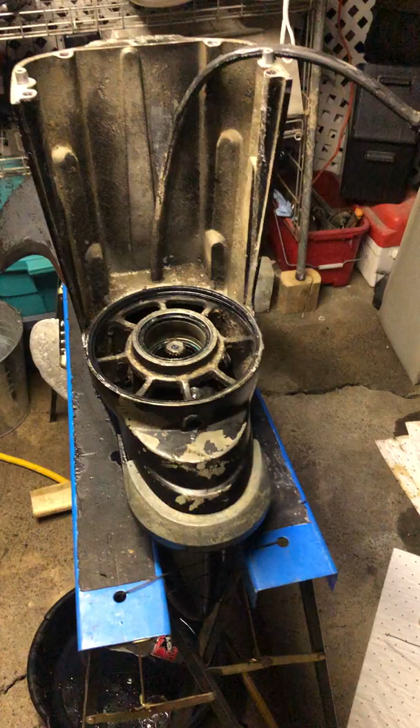All right, let me get you caught up.

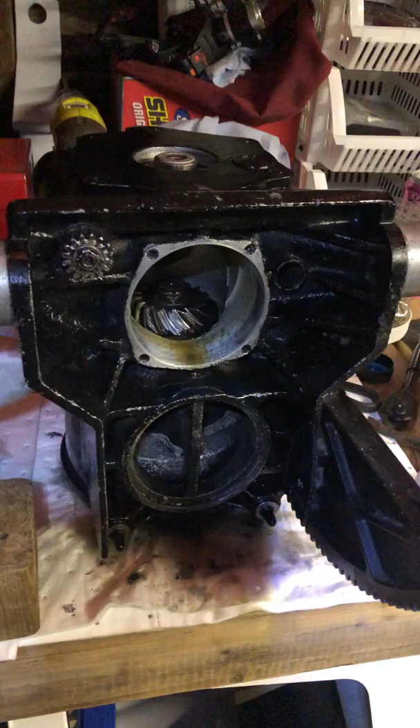So I did a water pump and I also got my gears rebuilt. You can see that in there. I'm sure the video doesn't do it justice, but they're pretty good. I had everything installed, put back together, running on the back of the boat.

While I was waiting for those gears to get repaired by a friend, paid no money to have it done. Actually, it was my cousin. I had these gears in.

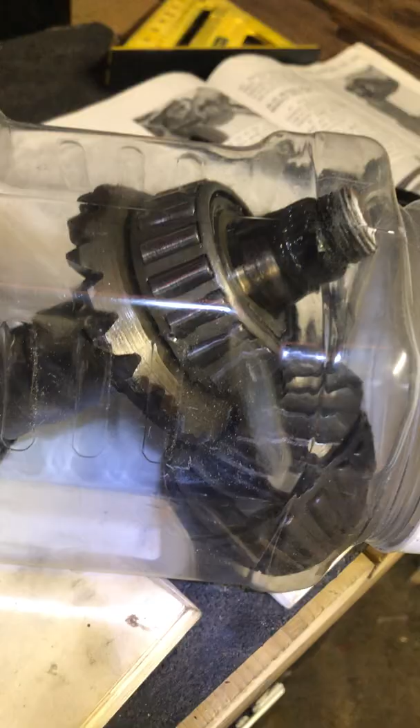A real nice set out of a 1964 something or other. So those are 17 and 21. And the gears that originally come in the stringer, I believe this is an 81 version of the stringer, were...

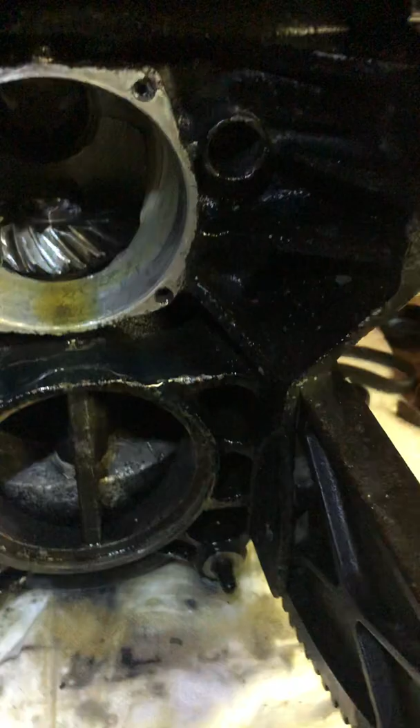19 and 21, okay? So these had some chips in them when I did my water pump and seals last. You could tell it looks like shit in there, hey? Definitely doesn't look brand new. But it seals up, it runs great, everything's good. I just don't beat the shit out of it.

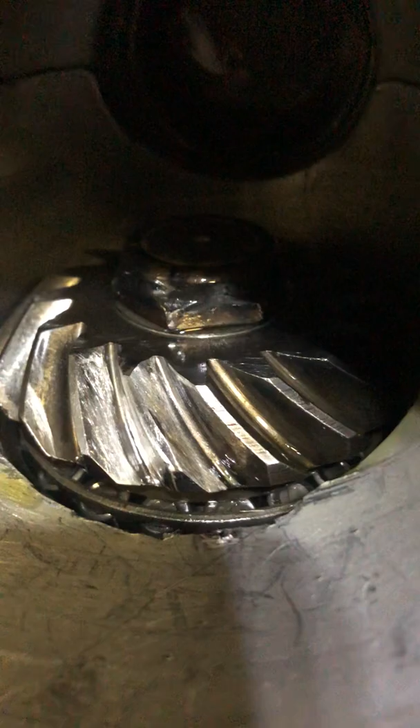So anyways, here's the repair on the gears. It had a chip. So like, these gears are like 800 bucks. Who wants to spend 800 bucks? I didn't, so I spent 300 and got those.

It looks good. So I'll get you caught up to where I'm at. So I took the outdrive off the boat.

As you can see here, I got two manuals open. I'll show you which manuals they are. So there's the original, gift from a friend, God love them - the Bible. And then this one is the Amazon version, or whatever, whoever makes this one.

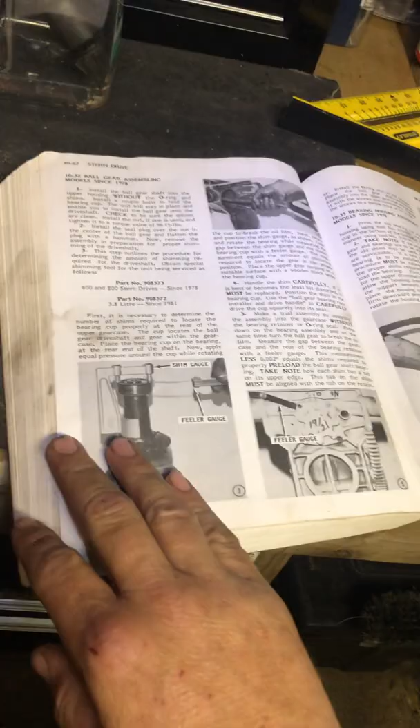They're awesome, there's so many details. And the best part about this version - oh, see that? 1981. The best part about this version is it's got the entire engine.

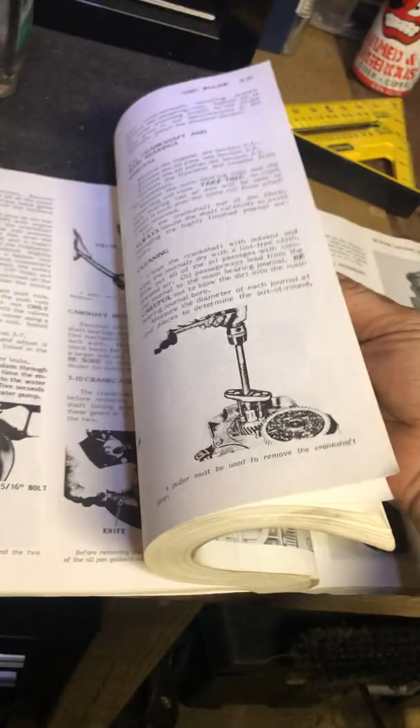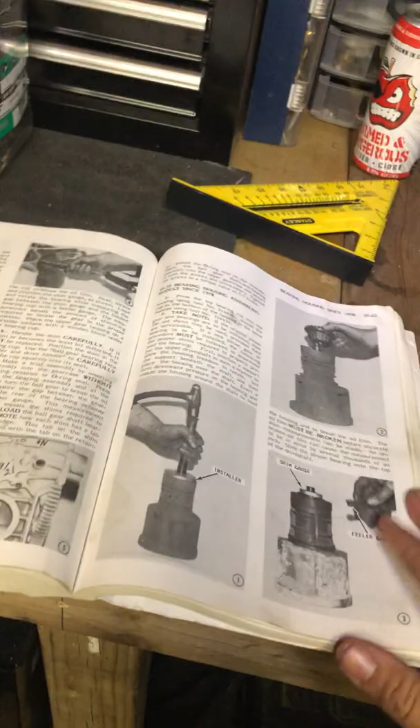And each version of the engine that came out in that time, all the way down for alternator timing, ignition, throttle sets. And then it also has electrical diagrams.

Here, I see I put some paper in here. See, I highlight my own stuff as I figure it out. But yeah, that's this version right here.

Bingo, bingo, bongo, back to where we were. You can tell where you were because the pages are really dirty. Where were we? Okay, this probably sucks for you guys - I guess it's a good example of how long it takes to find where you were.

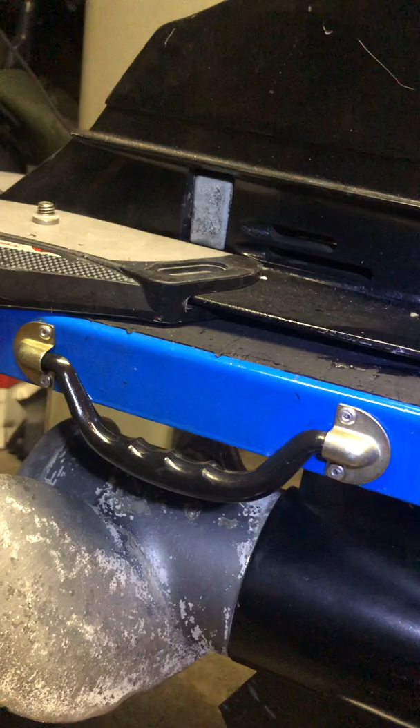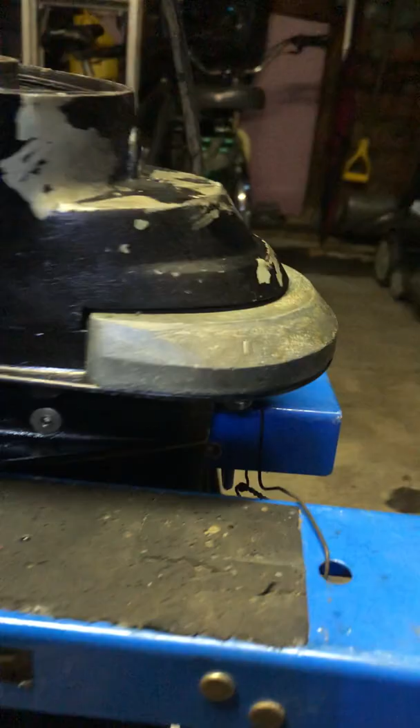So yeah, this is the stern drive section for my stringer, which is an 81. It's very obvious which version this is because there's an anode here. Actually, it might place it at 83. But this is how you determine the age of your outdrive, is where your anodes are. It's a fancy name for rust collector, or rust preventer, or corrosion preventer. It's an interesting thing.

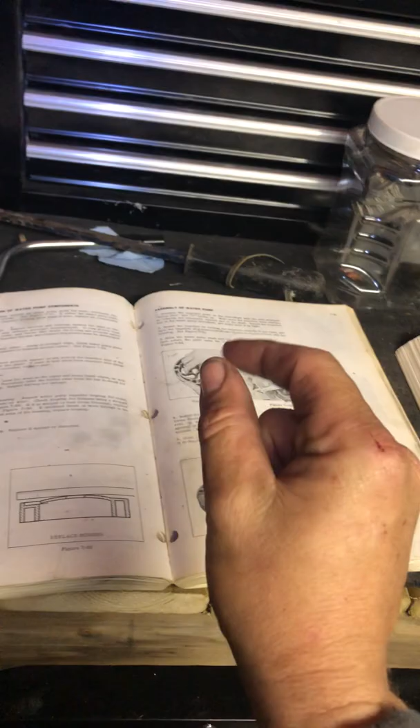So, where I'm at - got the outdrive off the boat. Went very well. This book here tells me to tilt it up all the way. This book here tells me to tilt it up just to the point where the two little plugs here - where are they? - these two little plugs are just out enough where you can remove the pivot caps.

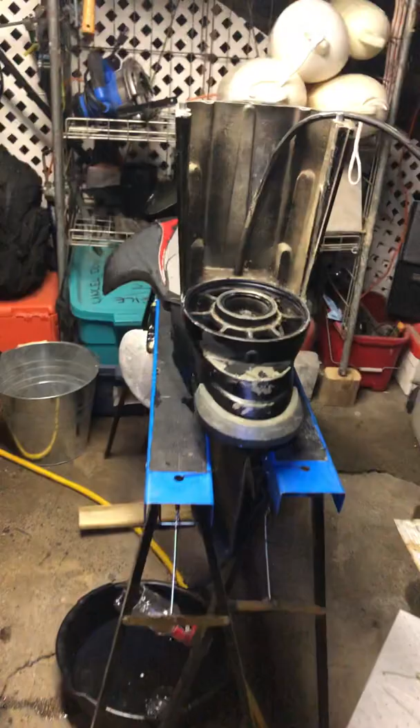But again, just to get you caught up where I am, I took the outdrive off, brought it in here, set up my sawhorses, which is awesome. These sawhorses are great. I get my wife to move this one in. Before I start, I wire the back together, so they wire together nice and close.

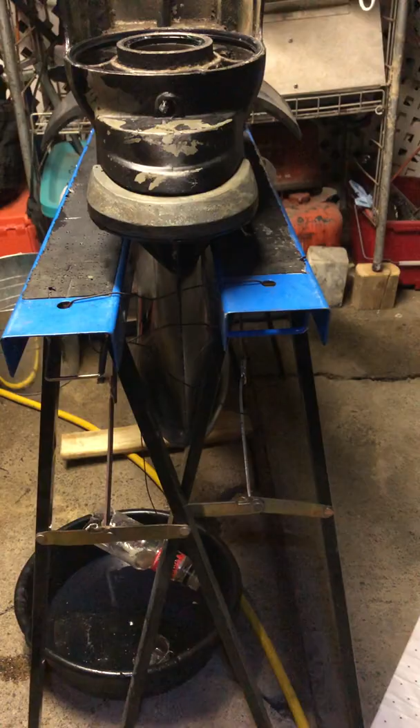Because I did drop it last time I did this. I'm what you call a broke boater, so I'm not a guy with lots of tools and lots of means. But so now I've wired it together and it's not going to slip apart when I'm cleaning or washing or working on it, and I'm not going to drop it.

An important thing to do when you're taking your shift cables out is to tape them up together. The book says to pay attention to how far apart they are, but I'm not that advanced yet, so I just go by whether it's obviously in gear or not. Anyways, where I'm at, that's what that looks like.

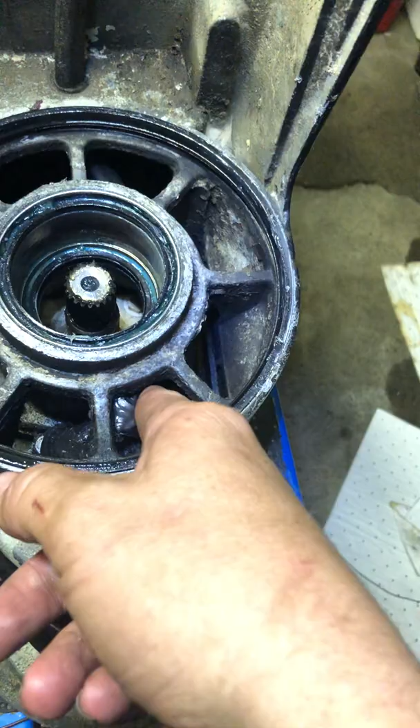There's a goop of grease in there. I don't know if that's where the grease is supposed to go, but I'll look at that later, because that's my shifter down there. This is the lower unit. I took the four bolts out that hold this unit in, they're in the top, I'll show you the top. That's where the water pump goes.

Yes, I know that's backwards and upside down. That's why I'm doing this job again. At least I didn't break it. I put my water pump housing in upside down. This part right here.

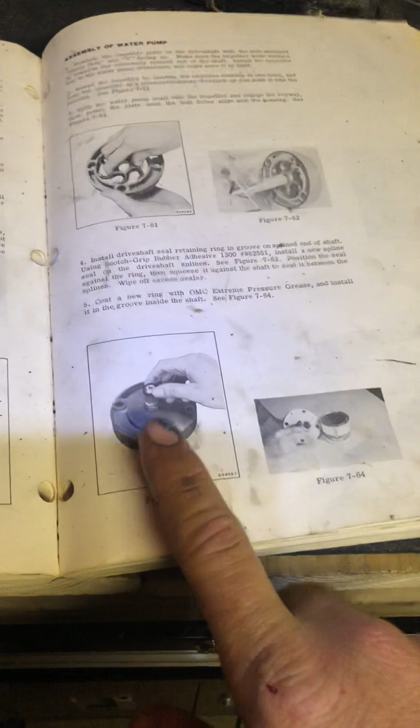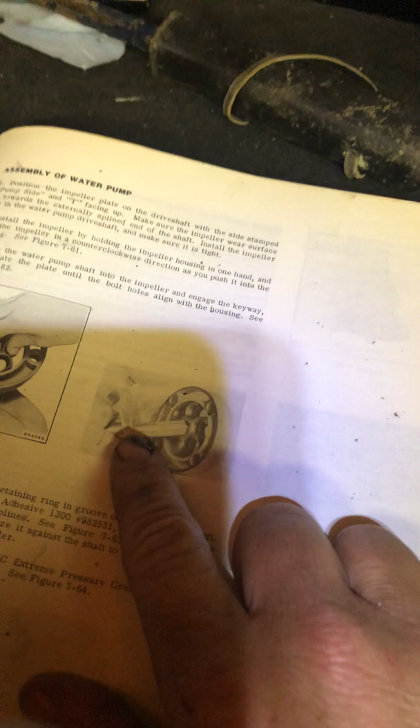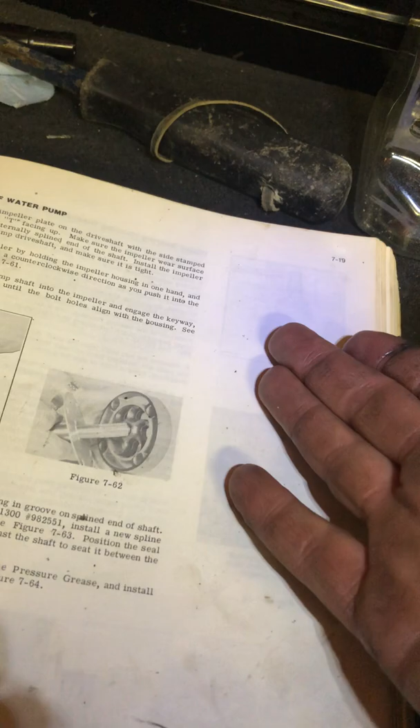You can see how... yeah, right here, this is a perfect example of what I did wrong. See how the shaft goes through the open side? What I did is I had this housing upside down, and I put the shaft through, then the lock, the key, and the plate.

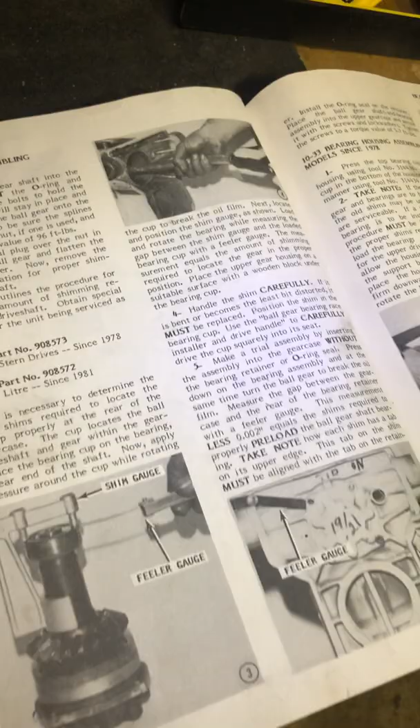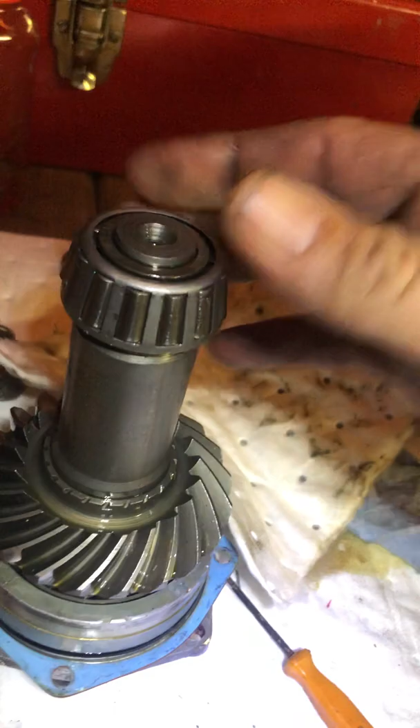It just shows a punch here, but I haven't had to punch anything ever. As far as the gears go, everything stays on the shaft. Bearings look good, everything looks good. Before I put it back in, I'll jam some good lubricant inside there.

Everything looks really good. This gear set especially I pay attention to because this is the one that was damaged. You can see the wear scratches, I can even feel them. I think when this piece that I had repaired broke off, it was playing around in there for a while.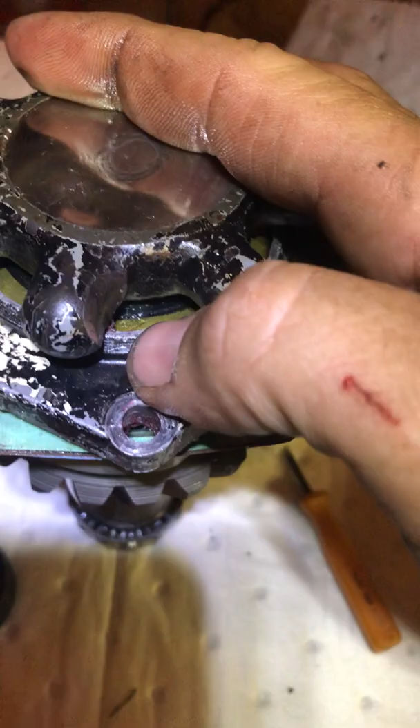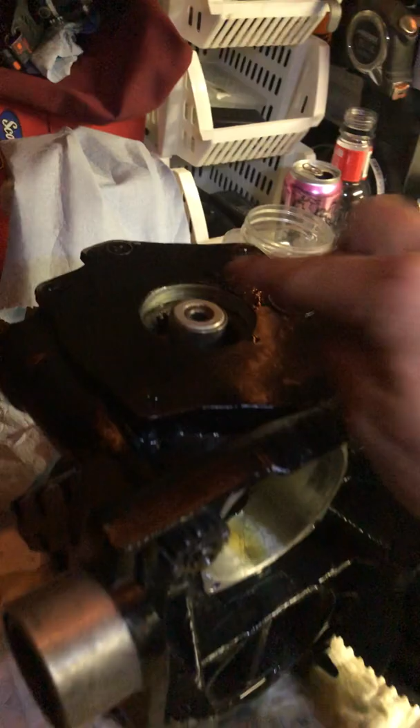I can't stress to you enough how important Loctite is to your seals. The seals in there - I had a friend do the seals and bearings on this last year, and he used Loctite. I blew air through the dipstick because I had to figure out where all the oil was coming out, so it was in the water, and I just put my lips against it, blew into it, and I could hear bubbles blowing out.

Then when I got the unit off and looked at it, I could take the ball gear itself right here, lift it in and out, just completely loose. So that goes for every other seal that the gentleman did.

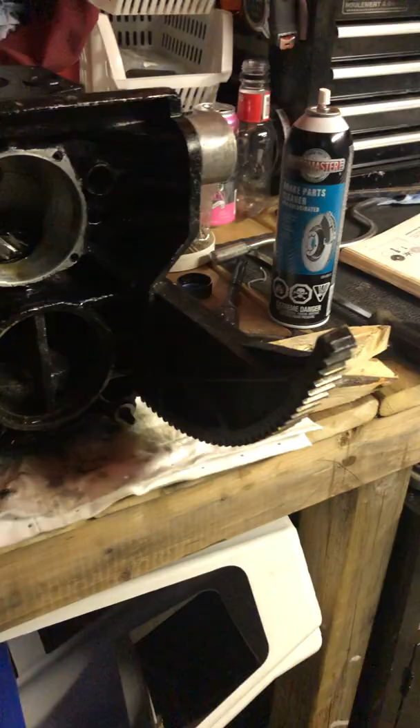The reason I'm taking it apart - I think I went through that - is because my water pump's upside down. So yeah, that's where I'm at today. What can I talk about with the lower unit? Nothing, because it's okay, I'm not going there.

I'd like to figure out where that grease is supposed to go and why it came out right there. See, there's like a grease fitting that goes through, and it's right there. Where does it fucking come out?

I bet you my camera works horrible. So yeah, I put some gasket seal on that last time I did this job. I'll take that off and clean this again. This thing's in really good shape, so I'll just reuse it, clean it up. Try not to use anything too aggressive to clean, because you don't want to dry out your rubber. I wonder if Armor All will be good to sort of refresh the rubber.

So yeah, that's where I'm at. I'm disappointed I didn't make a video last time I did this, and I'll make another video shortly when I flip it over and get that water pump out of there. It's pretty jammed. Cheers.